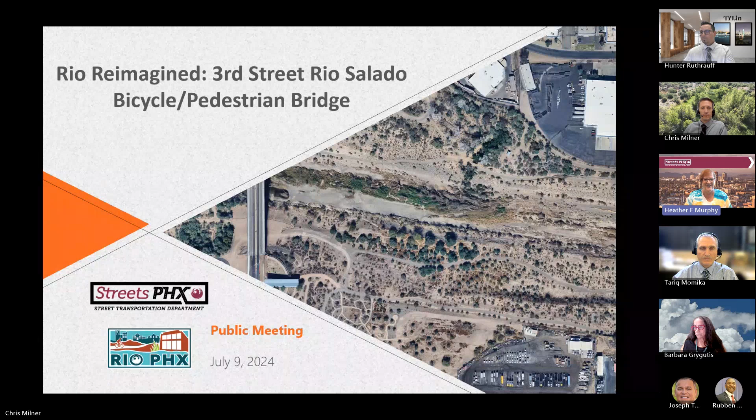First, I would like to introduce the members of the project team who will be sharing their knowledge with you today. We have Joe Brown, Street Transportation Director, Ruben Lawley, Deputy Street Transportation Director, Jared Rogers, Deputy Parks and Recreation Director, Carrie Brown, Phoenix Arts and Culture Deputy Director, Tariq Momika, Project Manager, Moshkan Vahabzadeh, Senior Public Art Project Manager, Chris Milner from TY Lin, who's the Project Manager on the consultant team, Hunter Ruthrauff, the TY Lin Bridge Architect, and Barbara Grygutis, the independent artist who was selected for this project.

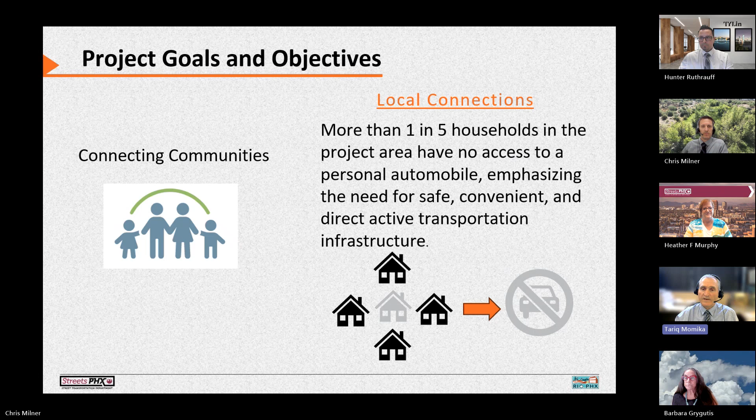Right now, non-motorized travel between these areas is limited to high-speed, high-volume roads like Central Avenue and 7th Street, which are focused on serving cars. However, as noted on the slide, 1 in 5 households in the project area don't have access to personal automobiles. This highlights the need for safe, convenient, and direct transportation options like walking and biking.

That's why the project aims to create easy connection between neighborhoods and improve accessibility. It will also provide a new, efficient route that enhances transportation options for pedestrians and cyclists. It will bring people together, provide easier access for the community to interact with downtown facilities, events, and businesses, offering an enjoyable route for commuters.

In addition to the local connection of Phoenix neighborhoods, this project also represents a regional non-motorized link, resulting in over 13 miles of low-stress streets and pathways along the Rio Salado. These pathways provide non-motorized connections between multiple cities - Phoenix, Tempe, Mesa, and even into Scottsdale via the Indian Bend Wash Path - for a total network of over 20 miles of pathway with no at-grade vehicular conflict or crossing at the completion of this project.

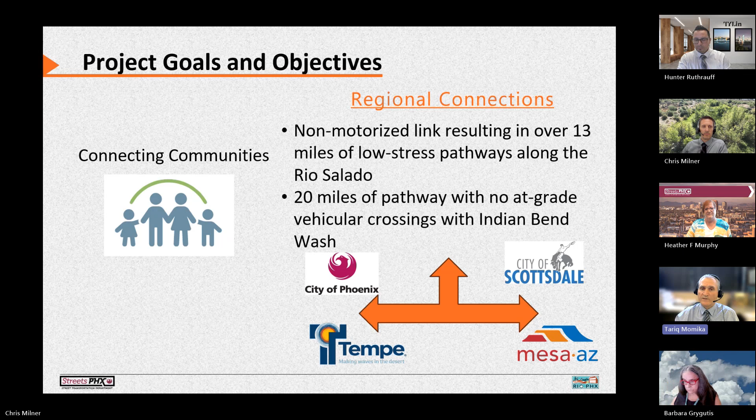Other goals are restoring and revitalizing healthy rivers and developing economic sustainability, as the city transformed the Rio Salado from a dump site into a green corridor as it looks right now. So this project is going to protect and improve that work, preserving the beautiful ecosystem just miles from downtown. This project is a big investment that will improve health, boost the economy, and support sustainable development.

Already, we can notice that on the horizon is the Arizona Fresh del Rio development, which is expected to provide hundreds of jobs. And this project will provide safe, convenient, non-motorized access, encouraging new developments and investments in the surrounding areas.

And that's the goal. In addition to that, the South Central Extension Light Rail train station immediately south of this project is anticipated to stimulate considerable transit-oriented development adjacent to the project area. And currently in the works is about 85 acres of new development on the southwest corner of Rio Salado and Central Avenue. That means the Third Street Bridge project will enhance the economic sustainability of these developments

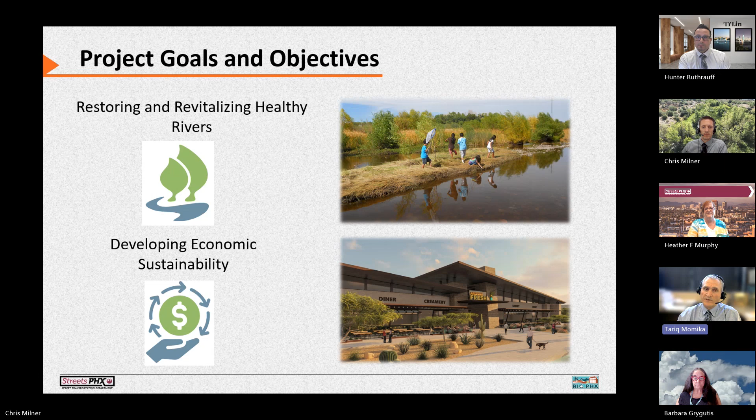The bridge is to provide seamless, safe, and comfortable connection across the Rio Salado for residents walking and biking. The project will also improve the southern bank trail of the Rio Salado by adding low-emitting solar pedestrian scale lighting and amenities from Central Avenue to east of 4th Street.

I will turn it over to the consultants team to explore the project history, design concepts, and an overview of the art aspiration and integration.

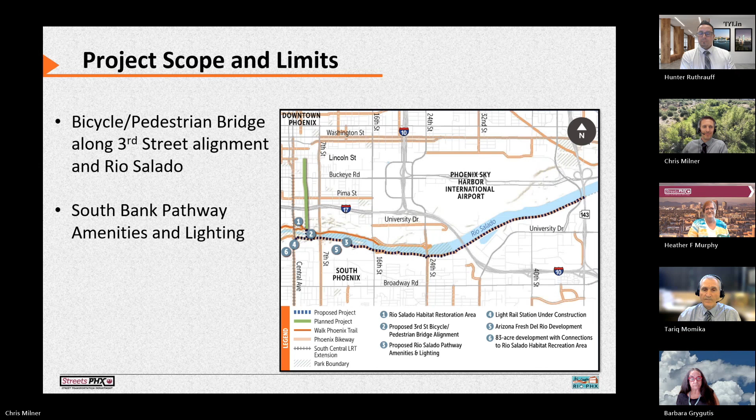Thanks, Tariq. We've been very fortunate to be partnering with the city on this project since it began in earnest with an initial project survey back in August of 2021. The results of that survey helped inform some of our design development, along with micro engagements performed by the Sagrado Galleria, who has deep connections in South Phoenix to help inform the inspiration for this project.

We moved forward with a public meeting in October of 2021, which had a survey following it, and again the results of that survey fed into our design concepts and the alternatives developed as part of the pre-design study.

The city was successful in procuring a United States Department of Transportation RAISE grant in August of 2022 that enabled them to move forward into the design phase, which is where we're moving towards today.

During the pre-design study, a preferred alternative was developed. It's called a basket handle arch, and in many ways it pays homage to the native peoples who originally inhabited the Salt River area. It's also key as a preferred alternative because it protects the beautiful natural environment with a span long enough to respect and preserve the existing wetlands cherished in this area.

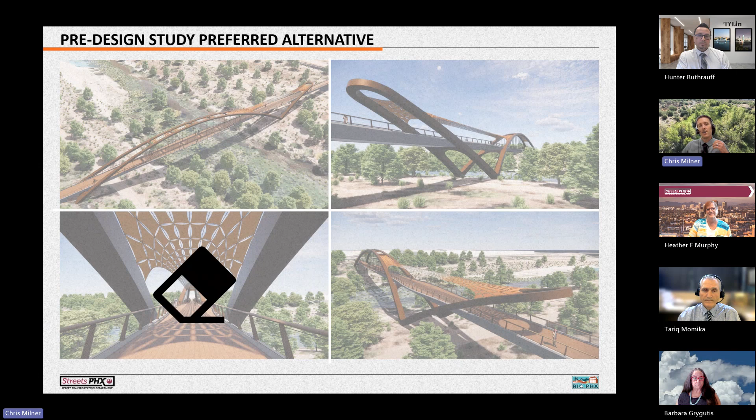Now, as we move forward into the design phase, our team has been tasked with taking a look at this design and refining it to better meet the needs of the community, which we'll see in this presentation. So we've gotten out our erasers and pencils and really gone hard to work to develop concepts that will serve the community even better than this original pre-design study concept.

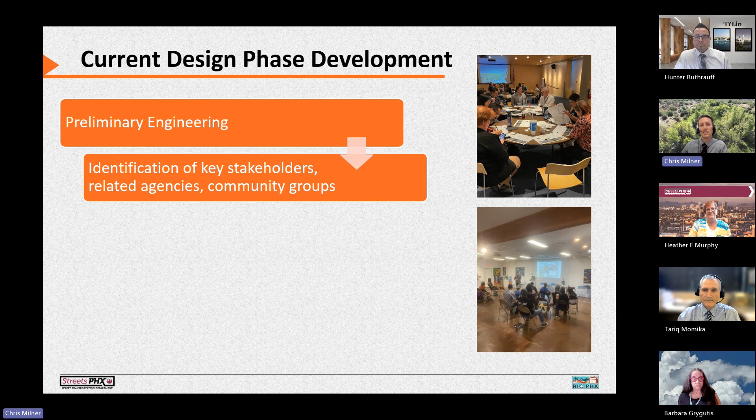In our current design phase development, we've been conducting preliminary engineering, which has included permitting with some important agencies. We've been working hard to identify all the key stakeholders we need to reach out to, any agencies we need to work with, and making sure we're engaging the whole community.

We had an intensive 2-day brainstorming and concept design charrette in May, and the Sagrado has continued with micro engagement activities with smaller stakeholder groups. Those smaller groups are going to help us identify additional elements that we can build into the project beyond what may be seen today.

Today, on July 9th, we're presenting some of these refined design options, and really what we're here to find out from the public is we want to hear your input on what you like about these concepts as we work towards a preferred alternative.

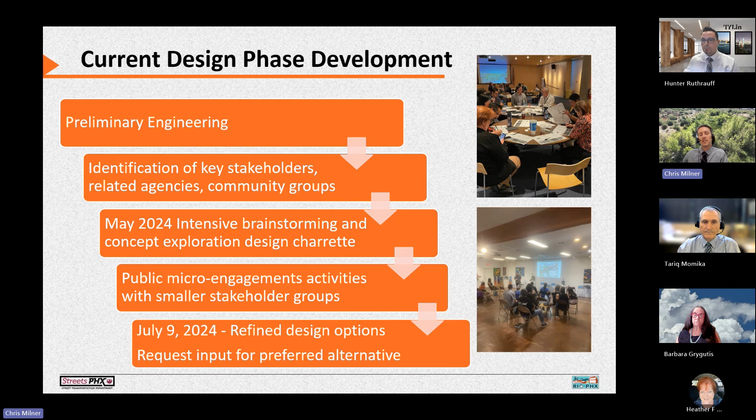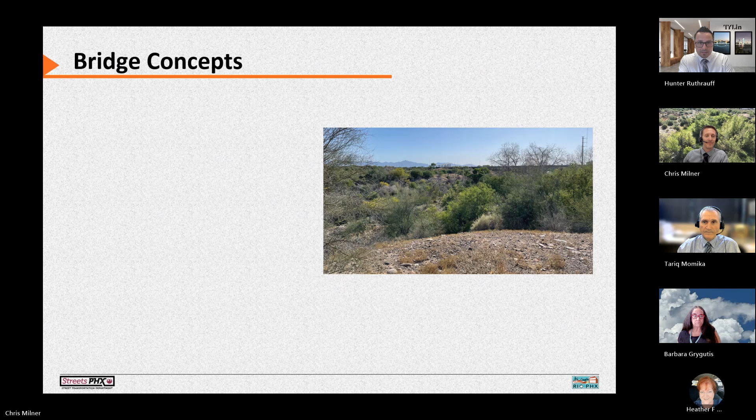And to present these refined alternatives, we have joining us Hunter, our bridge architect, to go through some of the concepts. Thank you, Chris. Got a little bit of a lag on our screen here.

So for bridge concepts, we've got 3 that we're going to cover. The first one we call the Spring, the second we refer to as Convergence, and the third we refer to as Union. So of the 3, we have 2 different kinds of conceptual design approaches.

The first is very much governed by performance-based design, which is to say that the arch needs to get over the wetlands, a fairly large span, but that's also related to its proportion and sizing of its elements. So that's one part of the performance criteria.

The second is really governed by shade, which is linked also to experience. That kind of conceptual approach is really governing the first 2 alternatives, while the third is a bit different in that it's really covering parts of performance, but very much largely about symbolism. We'll cover that once we get closer to it.

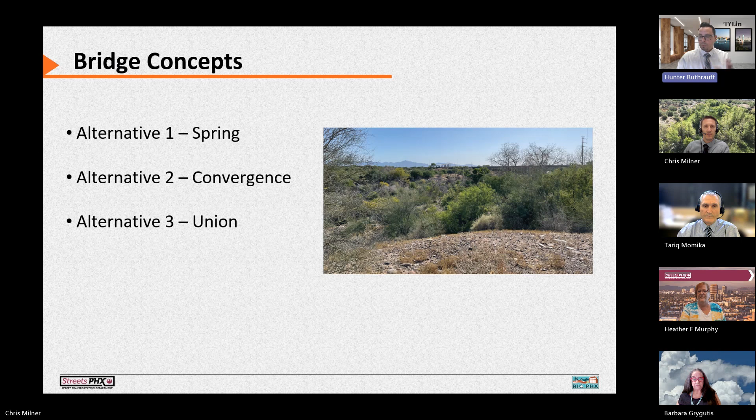This first alternative we refer to as Spring, because of the kind of general motion the arch makes as it jumps over the wetlands and then springs up into this parabolic gateway to the south entrance. In this area, we can see a north plaza, relatively small. We have the main span jumping over the wetlands, the delta frame, which is this triangle structure, and then a short span that comes into the fill. The overall span is about 480 feet in this alternative.

All 3 alternatives are about the same, with the exception of the third, which has another elevated length to it. The main span is 320 feet. The overall width of the pathway leading through the delta frame and the main span is 15.5 feet, that's 5 feet for pedestrians and then 10 feet for bicyclists.

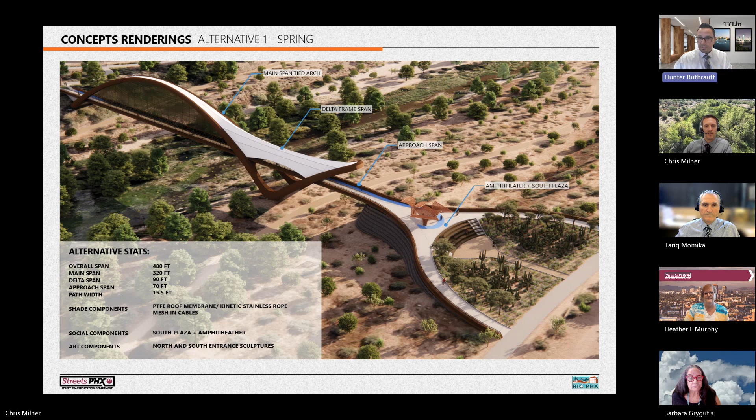As we can see here, the bridge splits as it gets to the abutment and has this circular embrace of the central native desert plants garden there. In the middle, we can see that the embracing pathway is focused on an amphitheater with stairs up to the upper plaza, as well as seating, just to take in your favorite kind of event there.

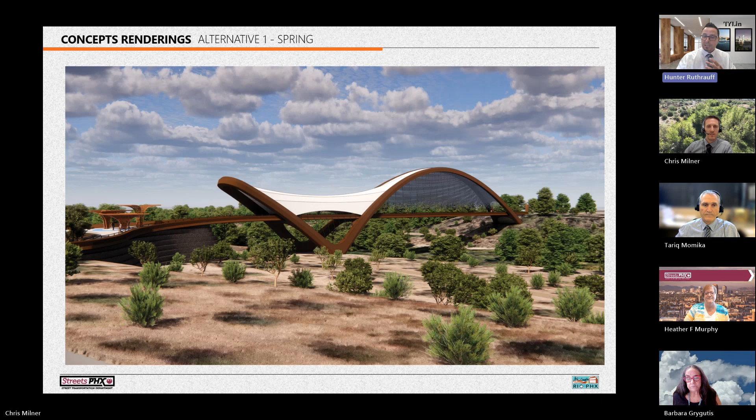This is a view from the southeast looking northwest, where we can really see the form of the bridge here. I would point out the canopy, which stretches over the delta frame and onto the arch to provide ample shading. There's also shading integrated into the cables. This particular element is kind of a kinetic rope mesh.

If you've seen the Footprint Center and the orange movable tabs, it's very much like this, the difference being it's a different color. It's also dissolving and getting more transparent as you get lower and closer to the pedestrians. This is to provide shade up above, but also allow views outward. So we can see the experience here is very much open to the views, but with lots of shade.

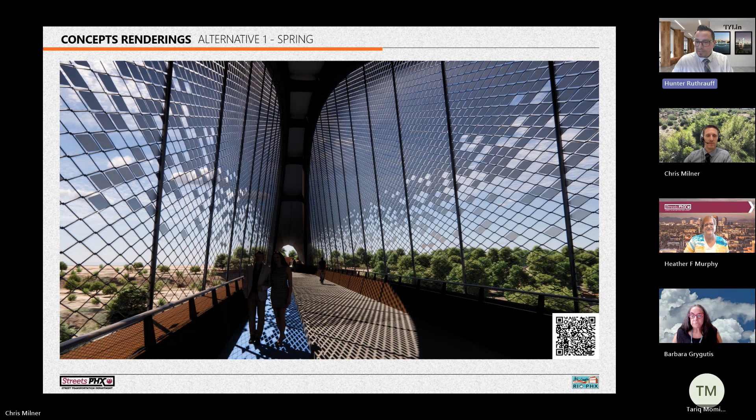Our next alternative here we call Convergence. It's a very similar type of structure, but with our first Spring alternative, the arches come up but don't quite touch, while with this one they're in fact crossing over. The reason we're crossing over is to provide a much larger roof system in the main span for even more shade. We've covered both the delta frame and the arch structure in a laser cut aluminum cladding, which has the silhouette of the salt bush.

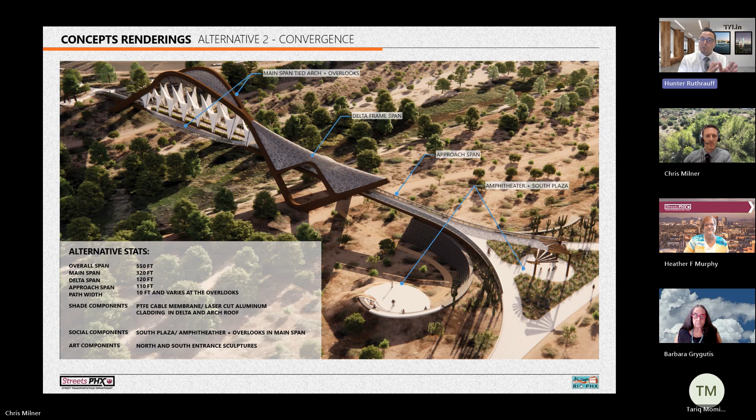The overall span here is 550. It's a very narrow path leading in at 10 feet, but once we get to the main span, there are large overlooks. The path continues forward, but then splits down to pathways which get you closer to nature and more separated from the pedestrian path in the center here.

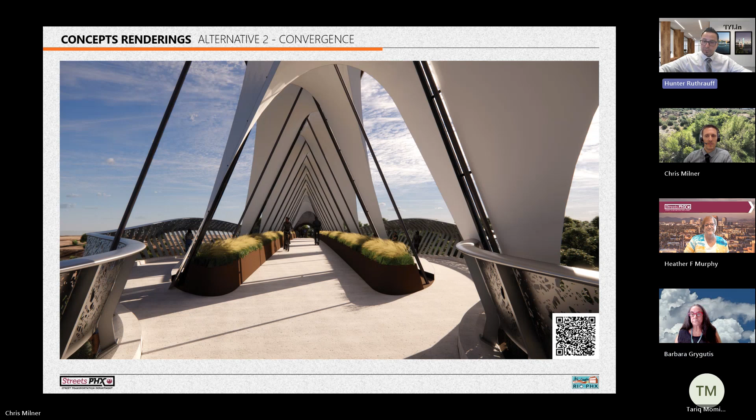So the central path is flanked on both sides by plants, but then splits down to this overlook region. We can also see that there's integrated membranes into the cables so that we get shade in these overlook systems on one side or the other throughout the day.

In this view, we can see the path sloping downward to this point, with grade separation between the central path, very much focused on the social aspects of the bridge. We can see amphitheater seating and stairs, as well as a shade railing, which allows views outward but also shade when you're standing next to it.

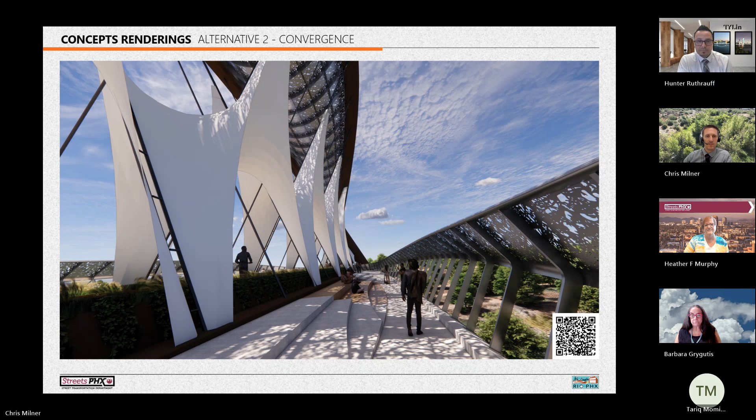Our third alternative, as I mentioned early on, was very different from the other two. This one is very much about symbolism in its form. The idea here is that we have this arch structure, which has retaining wall seatings and a corbel that morphs and becomes the arch structure, and then has this moment where it embraces the structure from the south. The idea is that the north and south both get their unique identities in the structures, and that there is a union in the middle, hence its name.

With this structure, its overall length was 650 feet. Its overall width is 12 feet, so a little bit wider than the prior. Once we get into that south approach structure, the deck starts to have a sine wave, so it wiggles, and its amplitude increases as we approach the south landing.

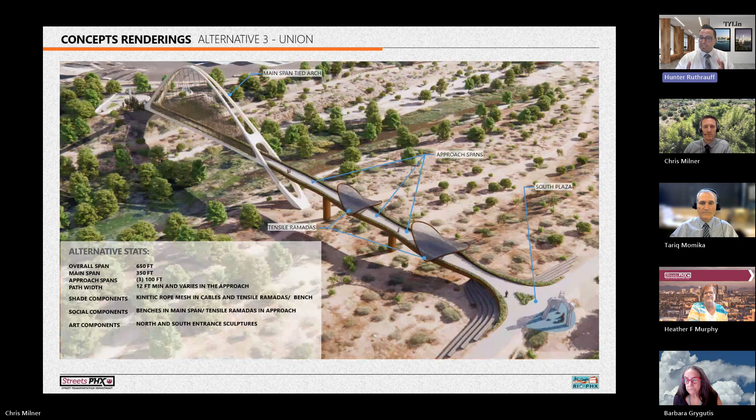The idea there is that as it widens, we have opportunities for seating underneath the tensile ramadas. Those ramadas have that, again like the Footprint Center, that kind of kinetic cladding that moves in the wind. The idea is that that movement is really reminiscent of the wetlands below and the fluid motion of water. Here's another view in the main span there.

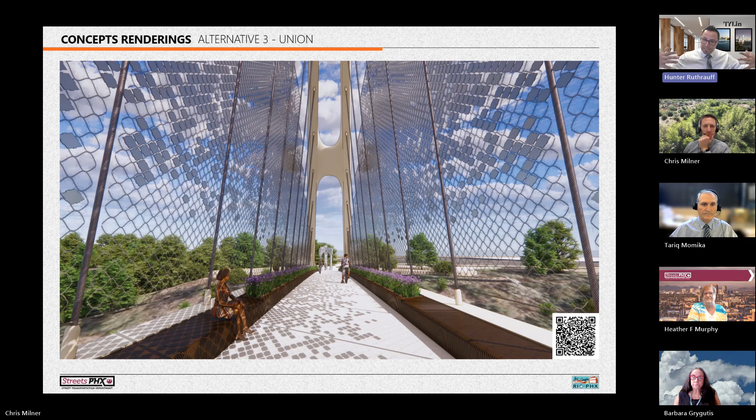This one is underneath the tensile ramada. There's seating in the main span as well as planters. So it really feels like the park of the setting has emerged and gradually crawled onto the structure there. Here's another view of the tensile ramada.

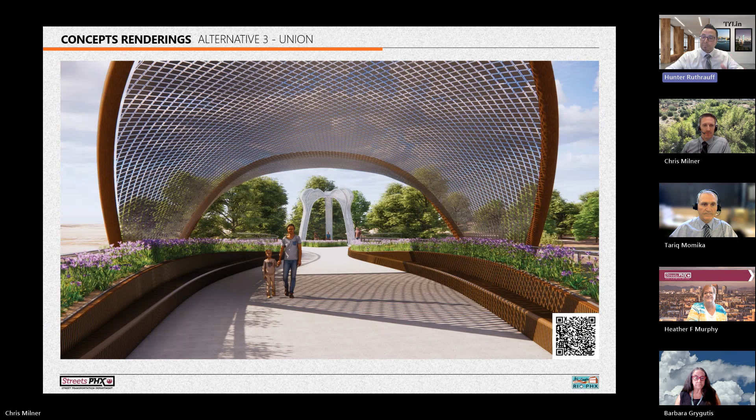Right here, we can see the benches being integrated along with the planters. The walls of the planters are zeroing out and then becoming deeper for seating, and then morphing back seamlessly into the landscape.

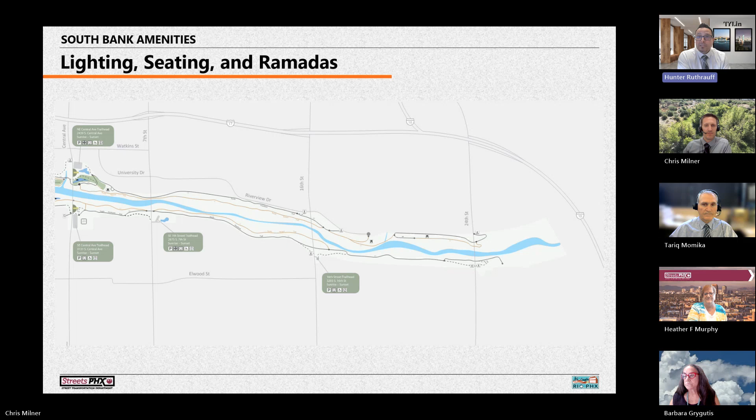In addition to the bridge, this project includes adding amenities to the south bank between Central Avenue and east of 40th Street. The existing Rio Salado habitat restoration area includes several trailheads, soft surface trails, and hard surface trails, which will be complemented with additional seating and ramadas. Light poles and fixtures are anticipated to be similar to the city pathway lighting elements. Seating and ramadas will match existing amenity aesthetics.

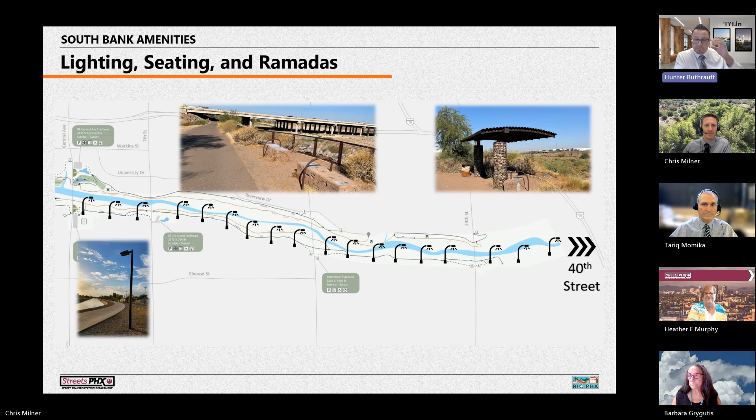And with that, I'd like to pass it off to Barbara to speak about the artwork that anchors the north and south plazas.

Thank you, Hunter. The City of Phoenix includes artists on their design teams for all their capital improvement projects. I'm Barbara Grygutis, the artist on the team.

In reviewing all of the public surveys and input for this project, the item that surfaced most was the desire for the community to have thematic development that relates to nature. So I've developed 3 concepts designed to work in concert with the bridge, but also with the various bridge alternatives, emphasizing an element of nature, the nature of this desert environment.

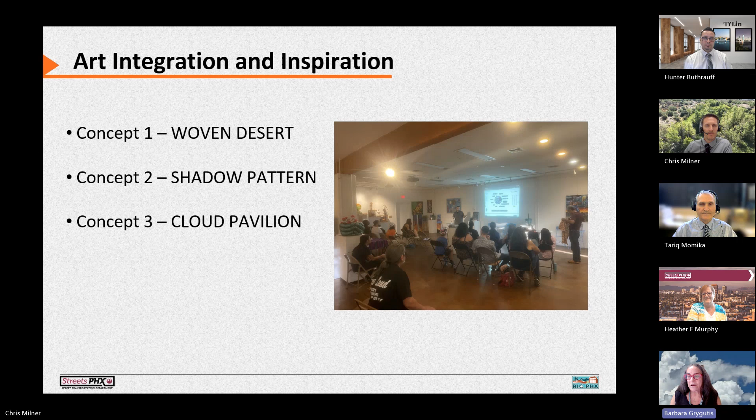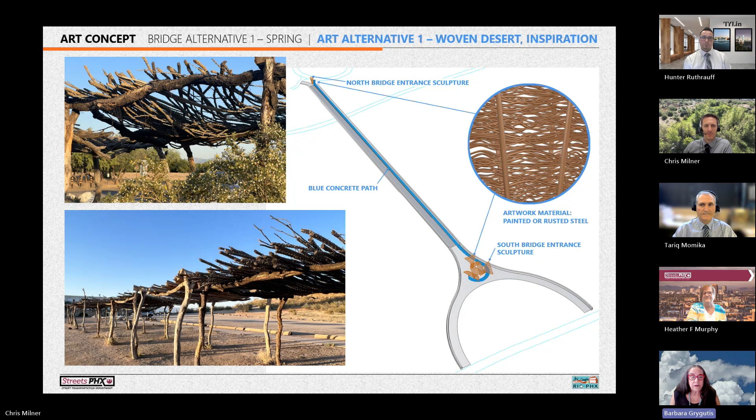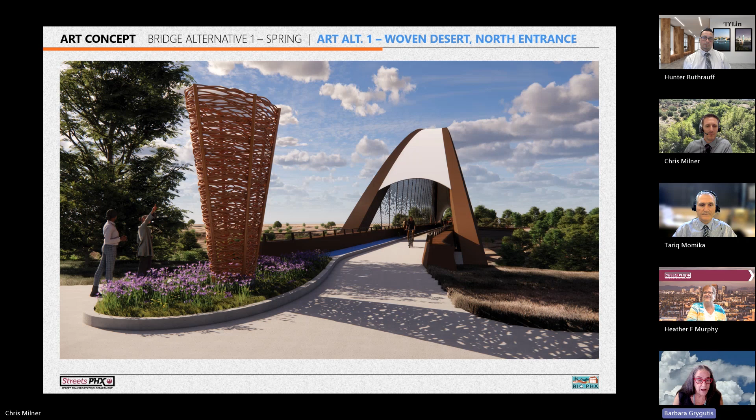The sculptures are fabricated with rusted steel or painted steel. The final decision on the material will happen later on. These are concepts and will be developed as we move forward and get community input. This sculpture, emulating a basket with woven material, is 12 feet tall and anchors the north plaza of the bridge.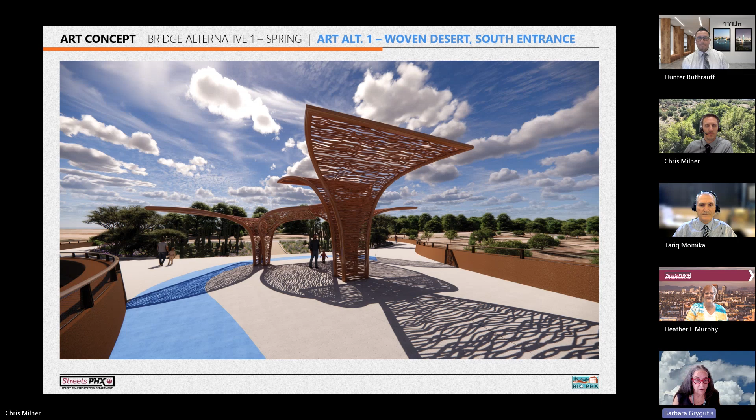Art concept number 2 is inspired by the shadow patterns created by the salt bush. In this image, you see the salt bush and how it is translated into a design that can be laser cut into metal. Again, 2 sculptures, one at the south entrance and one at the north entrance, are connected through the bridge by a blue walkway symbolizing the river.

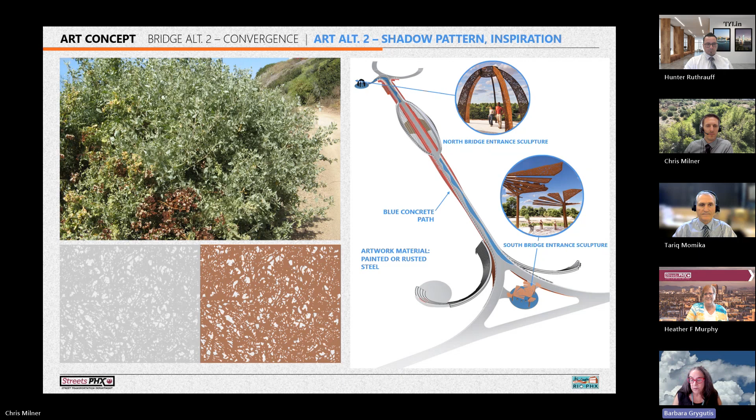The sculptures in this concept take a different form and are fabricated with laser cut material based on the salt bush shadow pattern. This is the North Plaza. It's a smaller plaza, and each plaza creates its own type of human space for human interaction.

In this particular North Plaza, if this direction is selected, perhaps an astronomer could be engaged to create lines that line up with the solstice sunrise and other celestial events.

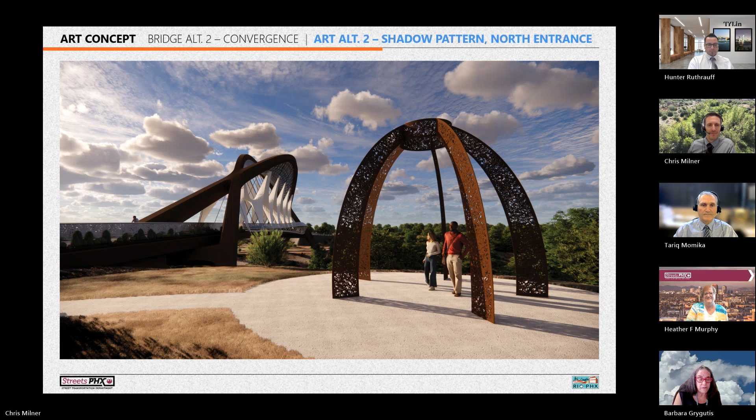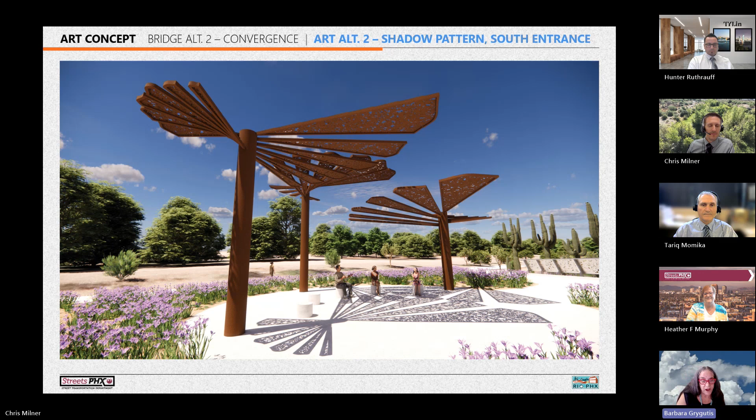This is the South Plaza sculptures. They create shade and pattern and create a space for people to sit and congregate. And this feeds into that beautiful desert botanical garden that's designed to the south.

Art concept number 3 celebrates the sky and the clouds that bring rain. The sculptures at the north and south bridge entrances create small pavilions for each entrance. Again, these sculpture zones are conceived as gathering spaces and are connected by a blue walkway through the bridge, symbolizing the river which we are crossing.

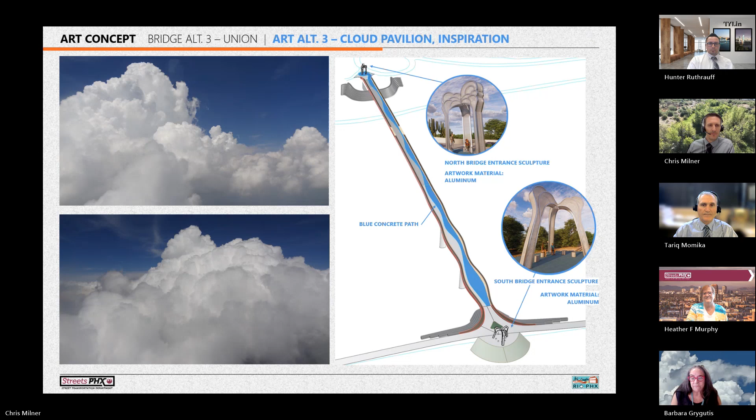These sculptures have a very different feeling than the first 2 concepts. This is the North Plaza. Here, the sculptures are fabricated with aluminum, a perforated metal, which creates very interesting moire patterns that are fascinating and beautiful when the light comes through them.

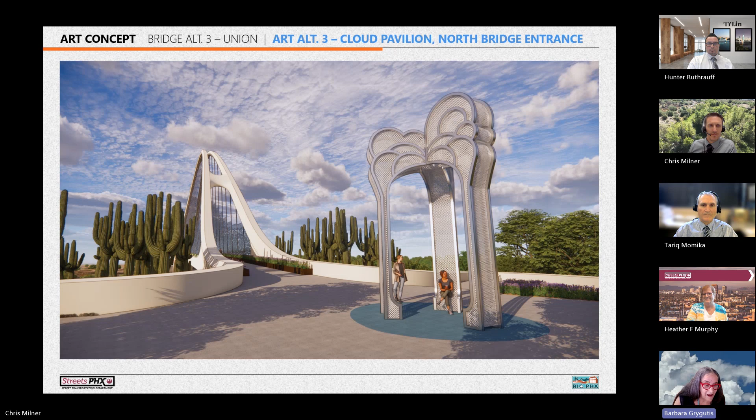You can sit within this plaza. On the north side, you can walk over the bridge and sit in the plaza on the south side. And here we are, the south side cloud pavilion. All of these three concepts are envisioned to have special lighting, no matter which is chosen.

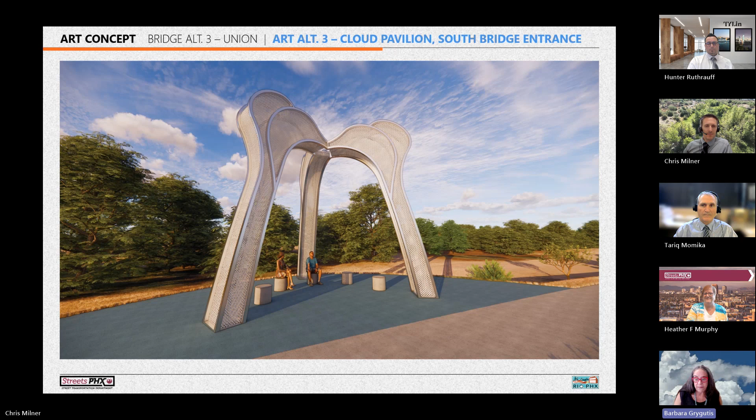I'm turning this back to Heather so she can talk a little bit about the project schedule. Thank you very much, Barbara and team, for sharing this inspiration and creativity that went into this.

I'd like to talk now just a little bit about the project schedule and where we go from here. So we've completed the pre-design phase, which took us through to 2023 and the winning of that federal grant. And we're now in the design phase, working on permitting and refining the concepts. This is where your public input is really, really meaningful.

On the next page, I'll introduce information about a survey. We'll have paper copies, but the next step is really going to be to lock up that design, develop the cost estimates so we can hopefully have all the permitting in place and begin construction in about 2027. There are lots of permits and environmental requirements to work in and around the riverbed, and we have to be respectful of the environment as well.